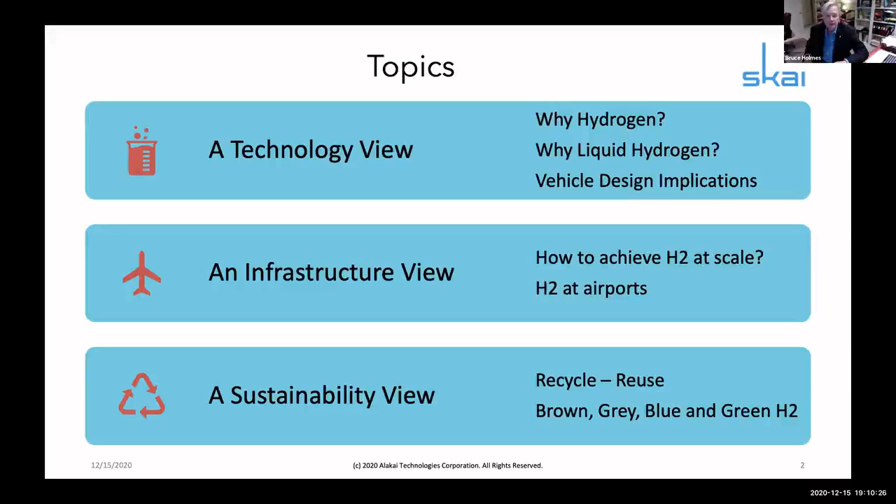And then introduce the notion of brown, gray, blue, and green hydrogen as it's beginning to unfold in mostly other parts of the world, not so much in the US yet. But if I had to make a prediction, which is always a scary thing to do if it's about the future, I think the coming few years in the United States, we'll see a hydrogen initiative, a set of initiatives grow.

Just a bit about Sky, our air vehicle. Just so you know, the experience that I'm basing a lot of my commentary on is the development of this vehicle over the past few years. In Stow, Massachusetts, we have a prototype engineering and flight test center at a little airport out there called Minuteman, 6B6, for those of you who track airports by ICAO codes. And the vehicle is a multi-copter. It's a hexcopter. It's fueled by a liquid hydrogen tank and 6 electric motors, of course.

Fairly simple in the sense that they're fixed pitch rotors, and the vehicle employs the latest technology as anyone would expect in terms of multi-redundant paths for flight control systems, for hydrogen powertrain fuel cell systems, including the ability to fly autonomously, but not as a commercial implementation at first. The air vehicle will be piloted. It has 5 seats in it, 1 for a pilot, 4 for passengers, and a very convertible form of interior configuration for other missions as well.

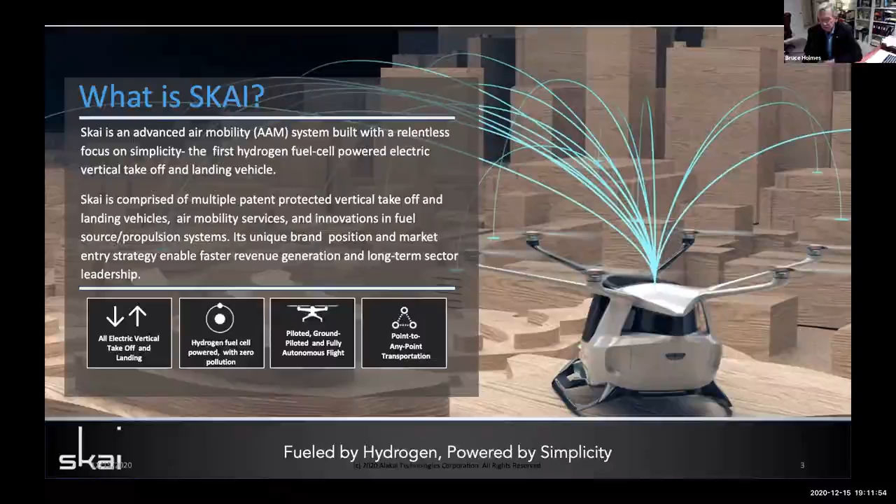A little bit about the overall competitive picture for hydrogen and the liquid hydrogen advantage. If you look just simply at power density for hydrogen and for batteries, for example, and for a hybrid power system, the prospects for advancement in all of these energy carriers for aviation applications give an edge to hydrogen from a purely vehicle capability standpoint. There are other factors that have to be thought of, of course, which include certification, the whole business of infrastructure for hydrogen energy sourcing, and the codes and standards related to the safe management of hydrogen in aviation operations as well.

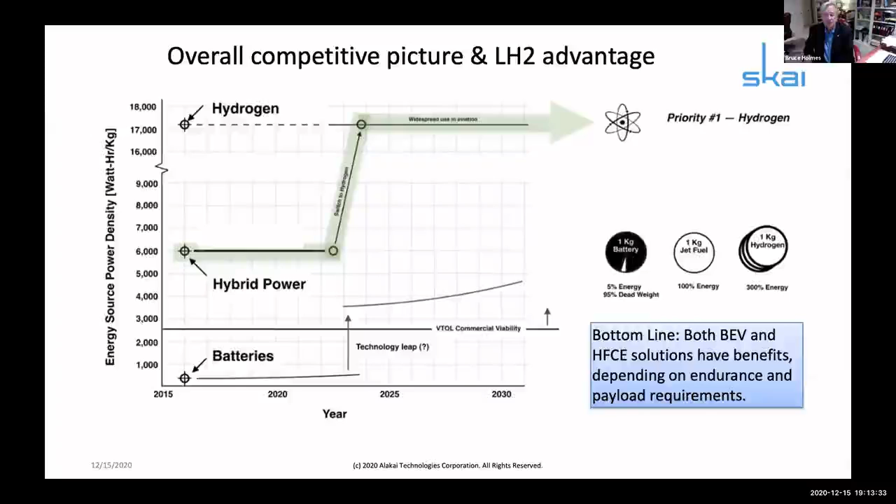A bottom line about this is that while hydrogen may have certain advantages in power density over the battery electric solutions for powertrains, both of them have places in this world, and they have benefits, and many of those benefits depend on how much endurance you really need and how much payload you really need for the mission profiles you're trying to satisfy. So it's great to see the battery solutions out there. If for no other reason, it's been a tremendous source of innovation in propulsion, aerodynamic airframe integration analyses.

So let me give you just a bit of a bottom line about the implementation of a powertrain based on liquid hydrogen, HFC, or hydrogen fuel cell technology. This is a bit of a history chart in one quick look, if you will, with the air vehicles across the bottom axis. You can see in the left-hand bracket the fixed wing from large to small, starting with the Airbus A380 at the far left, and then moving all the way down to aircraft like the Piaggio P180 on the right in that first bracket.

And then in the second bracket across the bottom, the light to heavy rotor wing aircraft, starting on the left again with things like the Bell 206 or the MD 500, and then moving over to the right to the larger ones that include things like the Sikorsky S92, for example, and others.

And then you see just a couple of sampled battery eVTOLs on the far right bracket on the bottom axis. And then in the colors, you see the red operating empty weight as a percent fraction of gross weight. It's just simply a way of expressing a mass fraction of the structure of the vehicle. And you can sort of see these straight lines drawn through the fixed wing air vehicles. As they get smaller, the mass fraction of the air vehicle structure grows relative to the gross weight. Not too surprising. There's efficiency and scale in aircraft design, and there you're seeing it for that parameter.

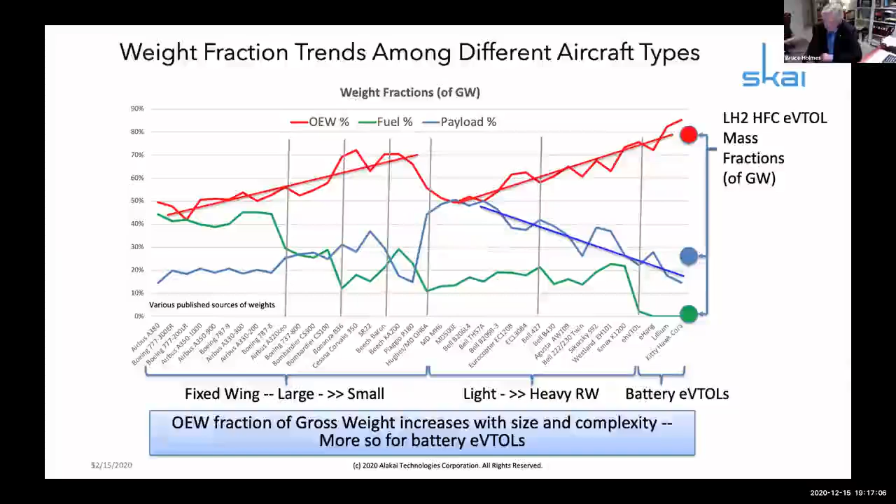A little bit about the infrastructure. This is one of the major challenges that those of us in the hydrogen space face. And if there's some good news here, it's the fact that the world is taking on hydrogen. You might call this the third wave of hydrogen enterprise development over history.

And in our case, with the idea for air vehicles, what we shared at a recent Department of Energy H2 at Airports workshop, hosted by DOE, the FAA and the Air Force, is that we see an opportunity to provide what you might call vehicle agnostic energy stations that could begin with green sources of electricity for inputs to the electrolyzers that then produce hydrogen out of water, and then for the liquid hydrogen users, a liquefaction machine that would produce the liquid, and you'd want to do that pretty much on demand because it's harder to store than gaseous.

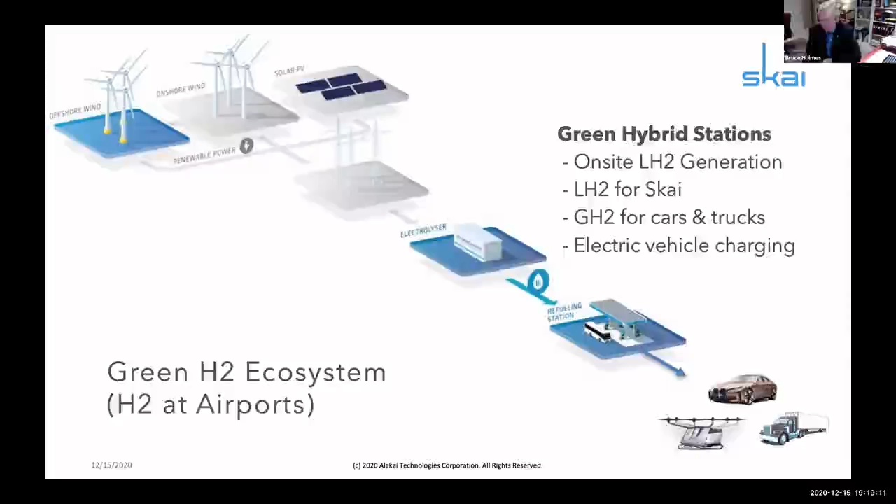But you can also use this hydrogen to recreate electricity for battery charging, for example, for cars or other electric vehicles and trucks, and then hydrogen-powered air vehicles or hydrogen-powered cars use these refueling stations in kind of an ecumenical sort of way. So it's a bit of our vision about how to move forward in a fashion where aviation can be an application which can help make the stronger case for hydrogen globally.

A few words about sustainability. Why batteries? And then, of course, why hydrogen? I think what is fairly easy to understand about the focus of the past decade or so on battery electric solutions for powertrains for aviation is that they're plentiful, they're available, they're reasonably affordable as an initial expense, at least, and they are flexible and have opened the door forevermore through distributed electric propulsion for changing the aircraft design envelope.

That design envelope is forever changed as a consequence of the work of battery electric and distributed electric propulsion. Once you can distribute electric propulsion anywhere you want on an air vehicle configuration, you can now change the configuration to satisfy demands such as vertical takeoff and landing in ways that were simply not practical, through acoustic, noise-related issues or powertrain mass fraction-related issues, and others as well. And then on the hydrogen side, what hydrogen offers is the ability to have the cleanest end-to-end solution for powertrain development for any application, including aviation.

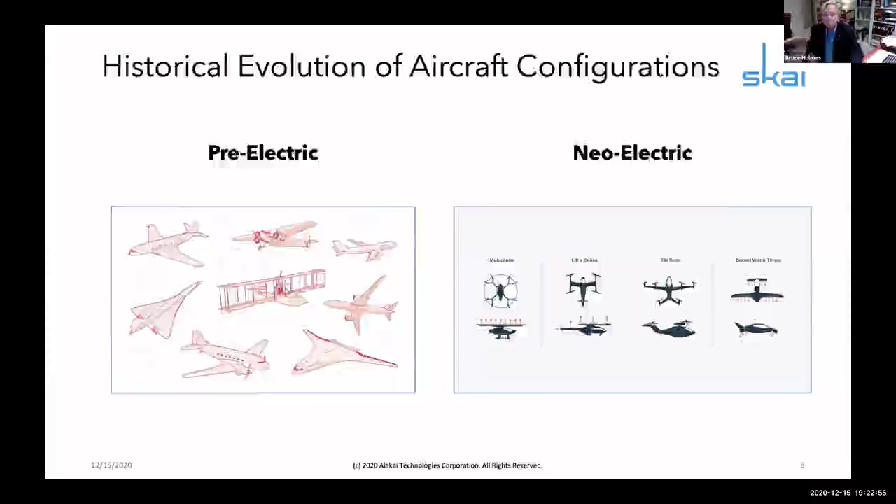A bit about hydrogen itself and its production options. You can make hydrogen in a lot of different ways.

I'll tell you a little story about my own experience when I was probably about 12 years old, growing up in the suburbs of Chicago. My buddy and I had studied my chemistry kit book about how to make hydrogen. So we pedaled our bikes down to the Bartlett hardware store in Bartlett, Illinois, and bought a gallon of sulfuric acid. Pedaled the bikes home, went down the basement, cut up my mother's zinc bottle caps that she used for canned, jarred fruits and vegetables for over the winter. I'm not sure I remember distinctly getting into trouble about that, but I probably did.

But anyway, we dropped the slivers of zinc into the acid bottle, put a balloon on top, and lo and behold, we created lift. We tied it off, took it outside, and let it go and fly in the sky. It was a mesmerizing moment for me, and little did I imagine that all these years later, I'd be wishing I had stayed more awake in my chemistry classes in freshman college, both times.

But there are many ways you can make hydrogen. Black hydrogen is a reference to steam reforming of coal-based feedstocks. And it really is quite as simple as making steam and then literally blowing the steam through coal feedstock materials, which causes the reaction that separates the carbon, the oxygen and the hydrogen in order to create separated hydrogen.

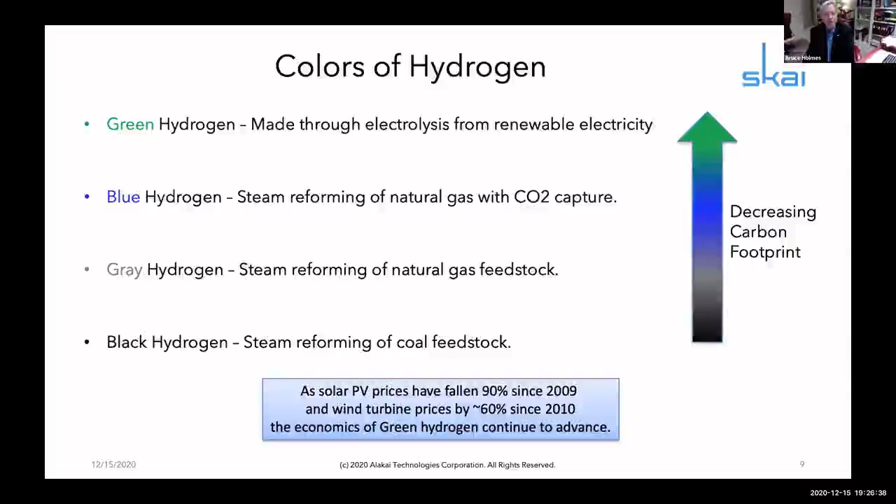Green hydrogen, of course, would be produced through electrolysis from renewable electricity, which can include photovoltaics and solar, as well as wind turbines. Those of you who live on the East Coast of the United States, and probably coasts of other countries, are seeing the proliferation of wind turbines for producing electricity, and the ability to use that green electricity for making green hydrogen is very powerful. Even nuclear can be a very valuable source of electricity for producing hydrogen as well.

A little bit about the life cycle of hydrogen fuel cell systems and their implications for operating costs over the life cycle of the vehicle itself. As many of you will already know, the fuel cell system basically consists of plates that have an almost Gore-Tex-like fabric on them, along with some other materials, including a catalyst, which can be, for example, a very tiny amount of platinum distributed across that fabric frame. And then you stack these frames together. It's why we call them fuel cell stacks.

One frame gives you about 1 volt. We have a 270 volt system, so we have about 270 of these very thin plates stacked together. That system then is the box through which you push hydrogen and oxygen, oxygen from the ambient atmosphere, of course. And you get electricity out of it. You also get heat, which can be very valuable to reuse for a couple of reasons: not only cabin HVAC functions, but also energy feedback into the entire process for efficiency improvements in the fuel cell stack performance. And mostly water vapor as well.

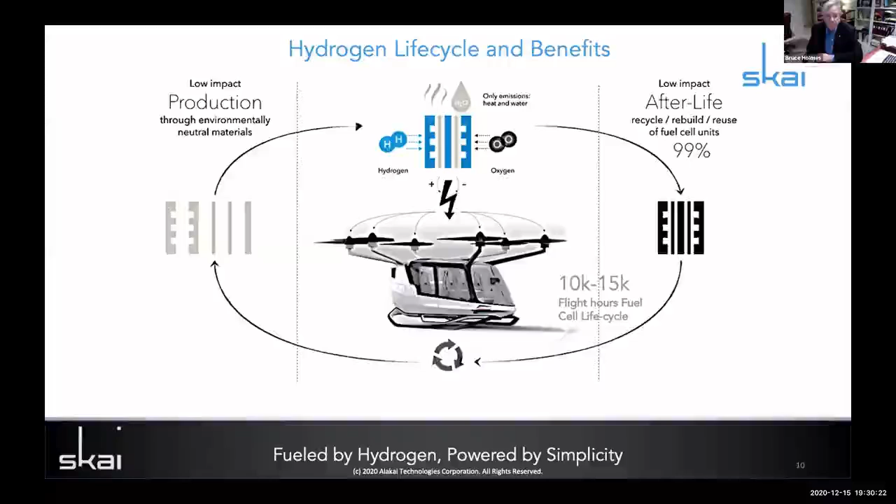A little bit about abundances and scarcities and the nature of losses in systems and what it means to the ways that I'm suggesting we and the engineering community need to think about hydrogen as a matter of abundance, not scarcity. When you look at the epochs that society has moved through, I'm thinking in the big frame of epochal changes from the Bronze Age, the Iron Age, the Agricultural Age, the Industrial, et cetera. Think about with me for a moment the way in which the previous epoch's scarcity became an abundance, right? And so what was scarce became abundant, and it changed the nature of society.

And I'll just take one example that's pretty easy to think about. In the industrial age, what was scarce and what was abundant? I suggest the simple answer is what was scarce in the agricultural age was power. What was abundant was land. And so as we moved across the threshold from the agricultural age into the industrial age, that abundance of power became the propelling force behind the growth in the industrial age.

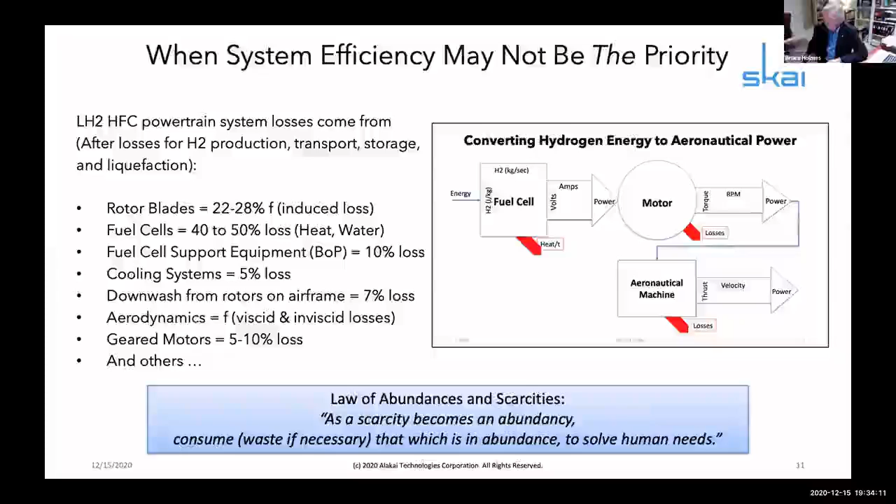The technology readiness level for hydrogen powertrain systems is somewhere, well, let me back up one step and say that for terrestrial applications in cars, buses, trains, forklifts, they're all at TRL 9. I am learning new things every day about hydrogen. I did not know until recently there are 4,000 cell phone towers in the United States whose former diesel backup power supplies have been replaced with hydrogen fuel cell power supplies because of the efficiency and the sustainability of hydrogen rather than diesel. There are 40,000 forklifts that are powered by hydrogen just in this country alone.

And so if you've got a Walmart distribution center or an Amazon distribution center or any one of those anywhere near you, if you can, you should organize a site visit, road trip, whatever you call it, to go see and talk to the people who operate those systems and learn, boots on the ground, so to speak, why they're there and how they benefit the operations of those centers.

So the terrestrial applications are quite mature in hydrogen fuel cell stack technologies. However, for aeronautical applications, that is not true. The TRL level is somewhere in the neighborhood of 4, maybe 5. And what that means is that, and this is very important, technology readiness level is a scale that was developed back in the late 90s, early 2000s, and used in spaceflight programs and many other aviation, aerospace programs. Many of you will be very familiar with TRL levels.

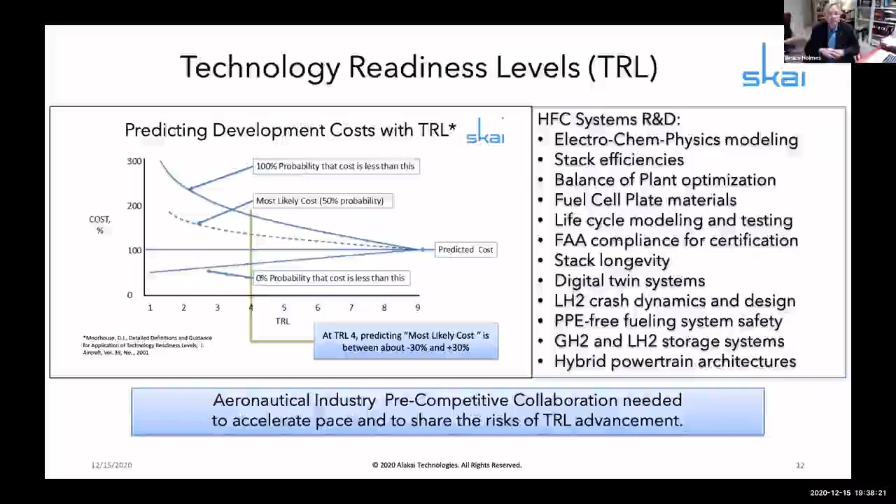What we need in this industry are aeronautical industry pre-competitive collaborations, preferably hosted by the government, but led by government industry partnerships that are able to accelerate the pace and reduce the costs and share the risks of TRL advancements for hydrogen systems. It's fair to say, as I said earlier, this might be the third wave of hydrogen over the past many decades, that we're seeing the movements by nations to declare themselves to become homes for hydrogen economies over the coming years. And of course, the primary drivers are environmental sustainability and total cost of ownership as well.

If you ask yourself, why hydrogen, there are really 3 reasons if you think about it from a global standpoint. One is air quality. Another is energy independence and what I would call geographic equity through distributed production and consumption capabilities with hydrogen. And the third is the affordability of renewable supply of distributed hydrogen production. For aviation, there are 4 very important additional motivations about why hydrogen. One is endurance. You get much more endurance with hydrogen for certain missions, especially heavier missions, let's say more than 1,000 or 2,000 pounds of payload, and more than an hour or 2 of endurance.

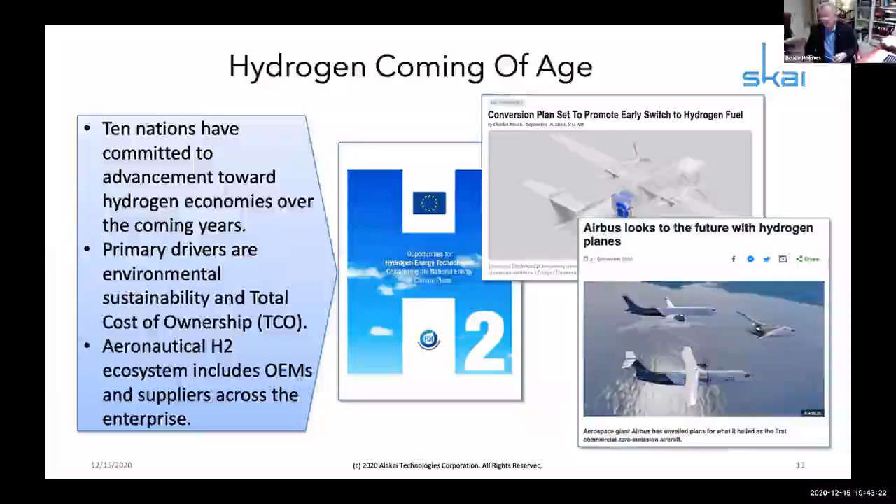And finally, hydrogen production costs are forecast to decline by about 50% by 2030, making hydrogen cost competitive with some conventional fuels. And that's before the impact of any technological breakthroughs is considered. The total cost of ownership study's been done also by DOE. It is forecast to decline by about 45% at merely 600,000 vehicles per year. They're mostly focused in their studies on terrestrial vehicles, but they do include the application potentially of aerial vehicles as well.

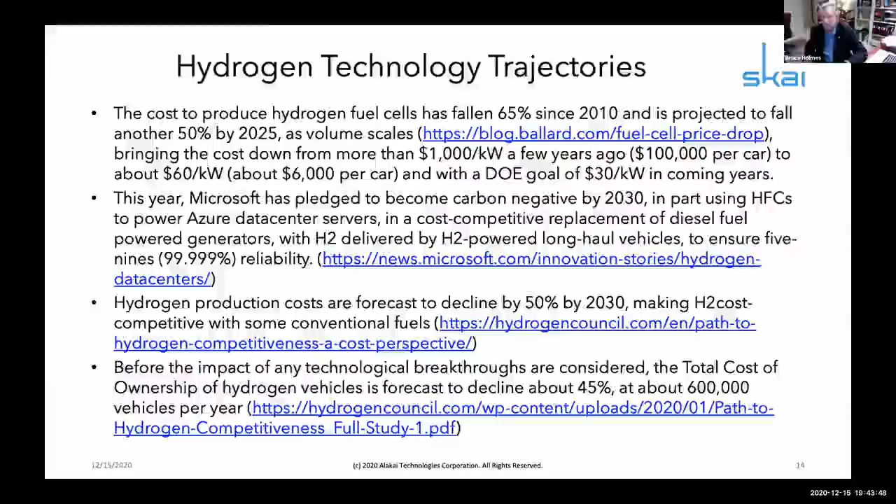There's information you can go to and study on your own in terms of the trade-offs, the benefits, the technology readiness levels, the challenges in infrastructure, and the business of making hydrogen work in an aeronautical application set that applies the benefits of this unique and most abundant element in the cosmos, hydrogen.